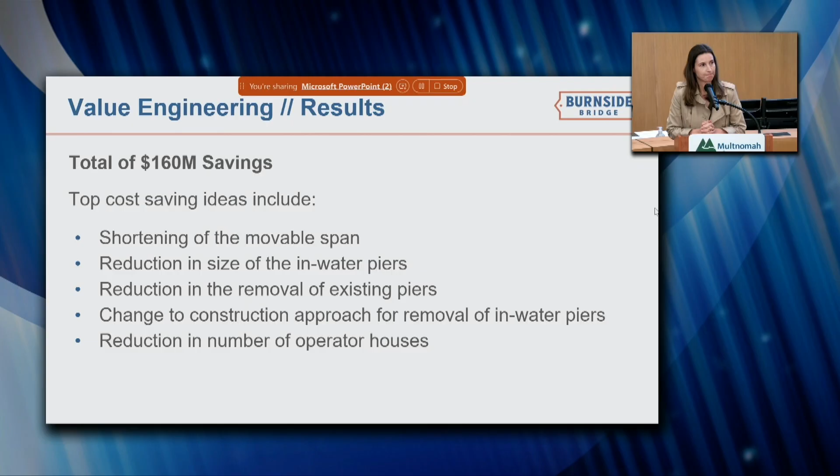After all that was said and done, our new updated range of costs was 1.6 to 1.8 billion. We know this is a pretty significant increase from the cost estimate we had in 2022. It includes all of our project phases, a pretty healthy contingency which is appropriate and industry standard for this level of design, escalation to the midpoint of construction based on the schedule we had at the time, and it incorporates that $160 million in value engineering savings.

So you might be wondering why the increase in costs. Everyone has experienced inflation since COVID, and over the last few years, construction costs are actually increasing at a rate higher than all of our basic commodities. Asphalt used in a different industry is actually less expensive than asphalt in the construction industry, and that's true across the board on construction materials. There's a variety of reasons for that, but at the end of the day, when we need to go get concrete and steel, those material costs are 20 to 40% more expensive than they were in 2022. That's a really significant part of the cost increases.

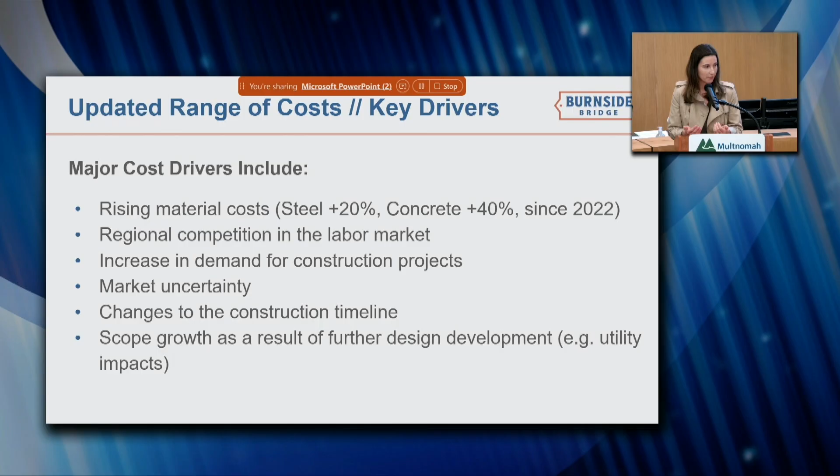At the time we did the estimate, there was also significant competition locally. We have a lot of major infrastructure happening in this region, so just the competition for subcontractors and labor increases the price for the work. And then there's a variety of uncertainties: uncertainty around tariffs, uncertainty around funding possibilities, uncertainty around which projects will go forward and which will not. All of that really lends itself to increasing costs.

And then we have some standard increases around just developing more detail in the design, you discover more impacts. You might find that the place where you thought at a concept level you could put your foundations is actually in conflict with a lot of utilities that we've now done the work to find and locate, and that increases the cost as well. So that's basic scope growth as you get into more detailed design.

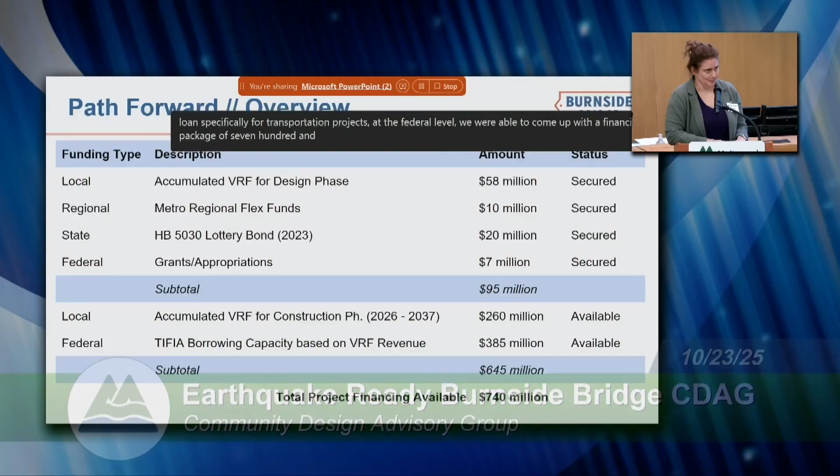At a high level, through our vehicle registration fee and the opportunity to take advantage of a TIFIA loan specifically for transportation projects at the federal level, we were able to come up with a financing package of $740 million. That's a combination of funds we have accumulated to date, so that's our savings from the VRF that we have already collected and set aside for the design phase, which is $58 million, some of which we've already spent.

And then the $10 million from Metro via a regional flex fund grant that I think a lot of folks here helped support the project in receiving - we recently received that. Then also, with much appreciation from this group as well, back in 2023, we were able to secure a lottery bond grant in the amount of $20 million. And then finally, I have $7 million in miscellaneous federal grants and appropriations that we've received, so that totals $95 million.

And then based on our future revenue projections of the VRF and with the really nice loan terms on this TIFIA loan, we feel like we could get another $645 million dedicated to the project. So that's how we are arriving at 740.

But on the next slide, you see, unfortunately, that leaves us still with an up to $1 billion gap. I will say we do have a USDOT Bridge Investment Program grant still outstanding, but based on our current assessment of the federal climate, we really have a low level of confidence of receiving that grant. That's something we've been applying for several years now in the amount of $447 million.

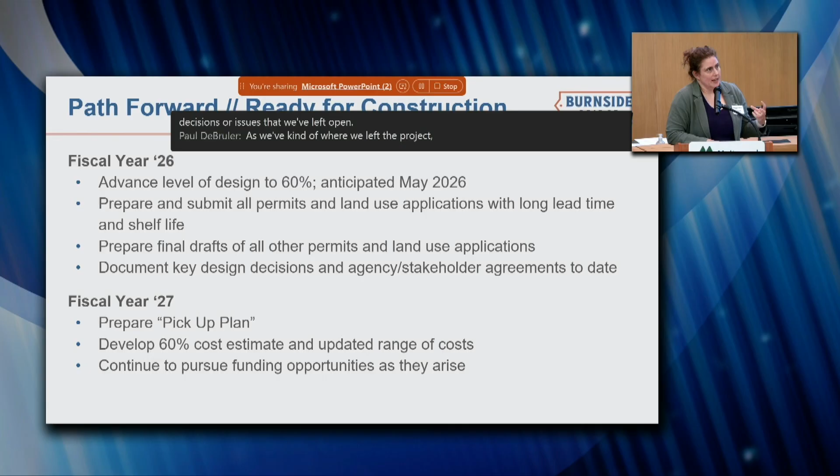So, pretty much addressing all the outstanding decisions or issues that we've left open as we left the project, so people understand what to jump on right away and continue the project moving forward. We will also develop an updated cost estimate based on that 60% package and the same really rigorous and thorough process that Emily mentioned previously that we applied to the 30% package.

And then we'll continue to keep our eye out for funding opportunities. There's a transportation reauthorization bill that's due in Congress, I think, in '27. There's also the 2027 state legislative session. If you've been tracking how the transportation bill went in this session, you know it's sort of a Band-Aid fix for transportation right now, so perhaps in '27 there'll be some political will to revisit transportation's needs and look at passing an additional bill. So we'll be tracking those opportunities.

And then, of course, as administrations change, we will be tracking any new grant programs that may continue from the IIJA package that was previously passed.

So we feel like taking the project to 60% is really the right step and no further. We're estimating it would take about 2 years to complete the right-of-way process to get to construction, and that's about the same time it would require us to take the project from 60 to 100. So we feel like 60% is a really nice sweet spot, especially since a lot of the additional work between 60 and 90 is really specific to the contractor who's going to build the project, so we would possibly have to redo that work if we took it that far and then restarted later.

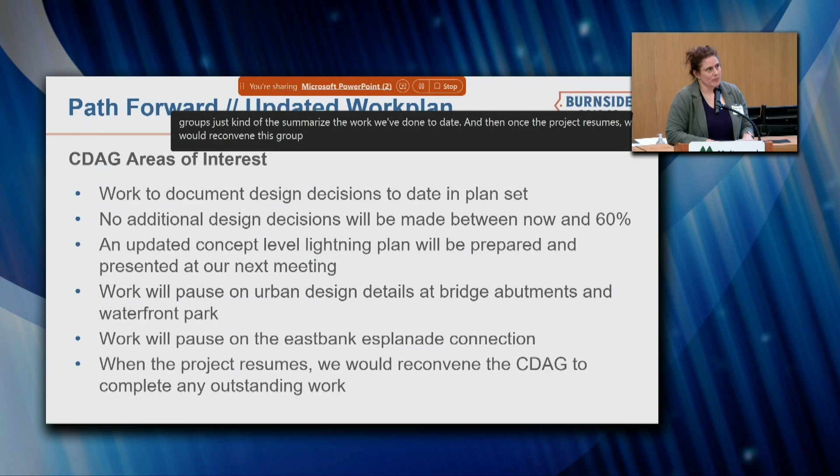We've been working very hard with the city and our consultants over many years to find a suitable solution. We'll go ahead and pause that work and just share with key stakeholders and interest groups a summary of the work we've done to date. And then once the project resumes, we would reconvene this group and complete any of the outstanding work to get the project to completion.

On the next slide, this does mean that we are anticipating that our next meeting on November 20th will be our last meeting until the project picks back up. Our tentative agenda for that meeting is to share updated lighting concepts, and we'll have HLB come back and talk through some of their new ideas and get some feedback. If we don't get through everything today that Keith was planning to share with you, we have that November meeting to continue any topics that have overflow.

We also want to share with you, we are planning to have a centennial celebration of the bridge next June, because the bridge turns 100 years old next year. We really want to help create a community celebration of this important, long-standing bridge in our community.

We'll also do some final thoughts, roundtable comments, closing remarks, perhaps focusing on what you would like the future CDAG group to consider if and when the project gets picked back up. And then we'll also have an appreciation party with some cake and some special guests, just to say thank you for all the extensive, long hours and hard work that you have volunteered as a member of the committee. So that is the plan moving forward.

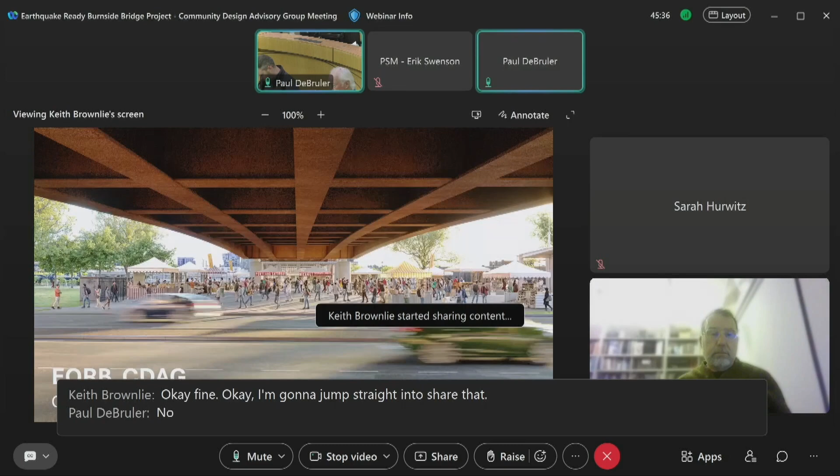And you all have this. You can see this? Yes, okay. Well, how long have I got? 30 minutes? 40, perhaps? Yeah, okay.

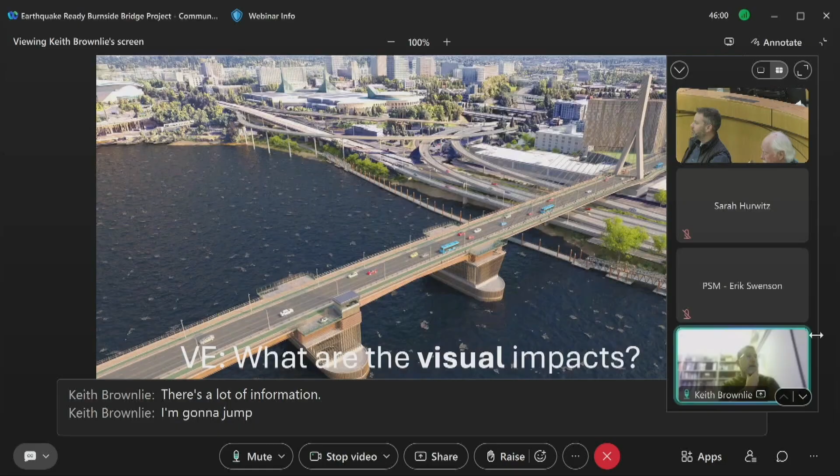There's a lot of information. I'm going to jump straight in. I mean, we've come a long way, certainly since my organisation started on this. You've come a long way. You've come further together.

So the value engineering process has changed a little bit, but just to give you the punchline before the content: you will still recognise the bridge we have debated over the last years and months, but there are changes. I want to run through them comprehensively, but not in so much detail. It's a little overwhelming, so I'm going to give you the headlines with a lot of images, and if you think I'm going a little fast, it's because there are so many of them.

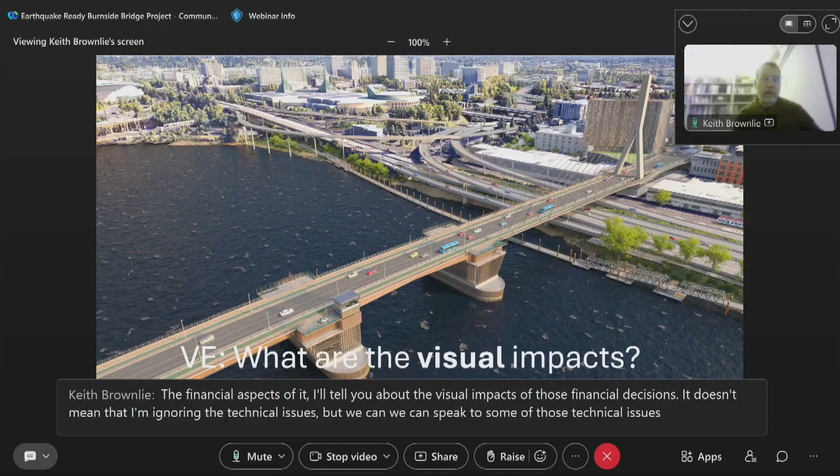So I'm limiting. You've heard about the financial aspects of it. I'll tell you about the visual impacts of those financial decisions. It doesn't mean I'm ignoring the technical issues, but we can speak to those if there are questions. I want to tell you what is different now than the last time we met.

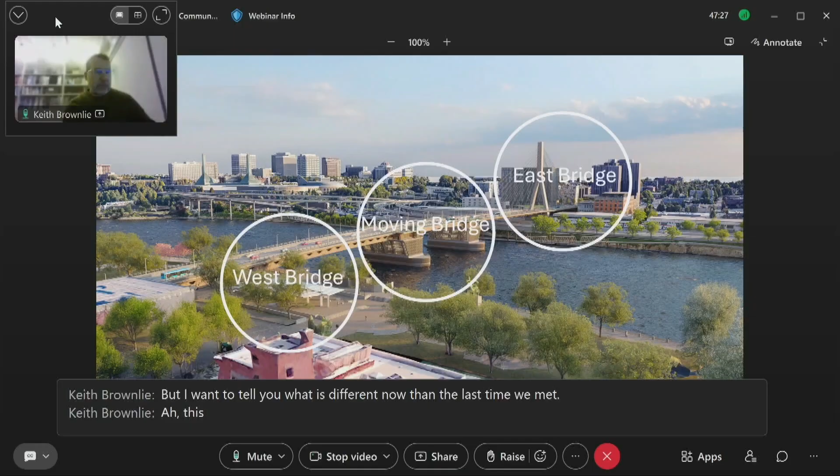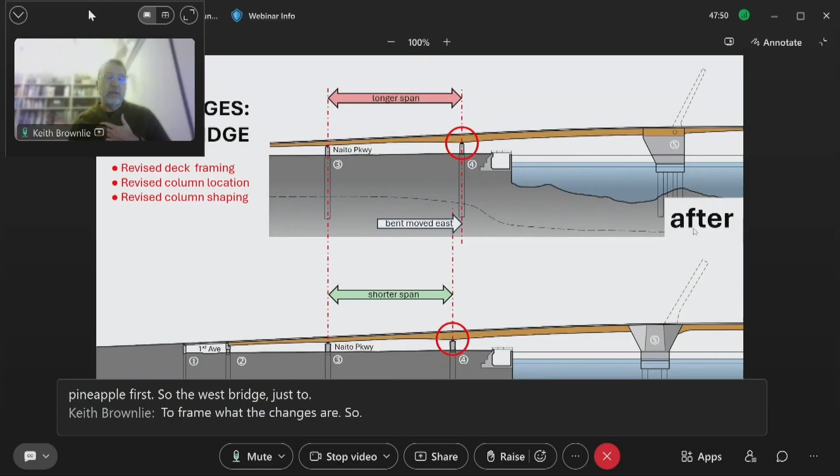So the West Bridge, just to frame what the changes are. The after is the value engineered version. The before is what we call that, and I believe everything before you have seen, but it's possible not. So the West Bridge, the chief takeaway is that we have moved some of the span arrangements around.

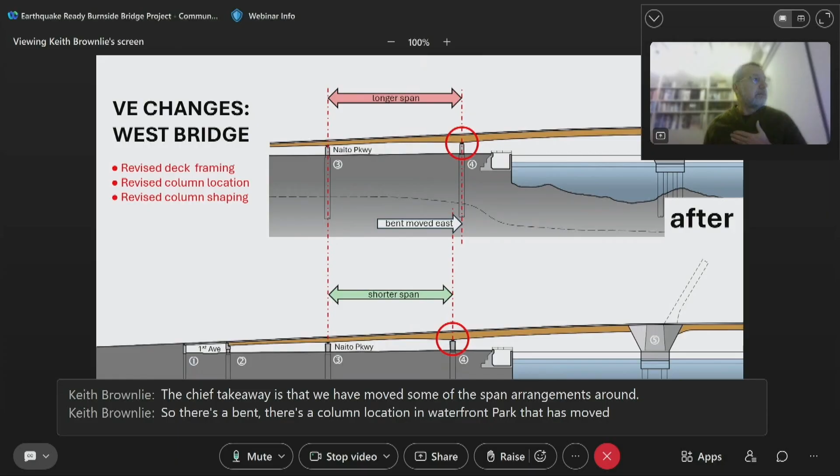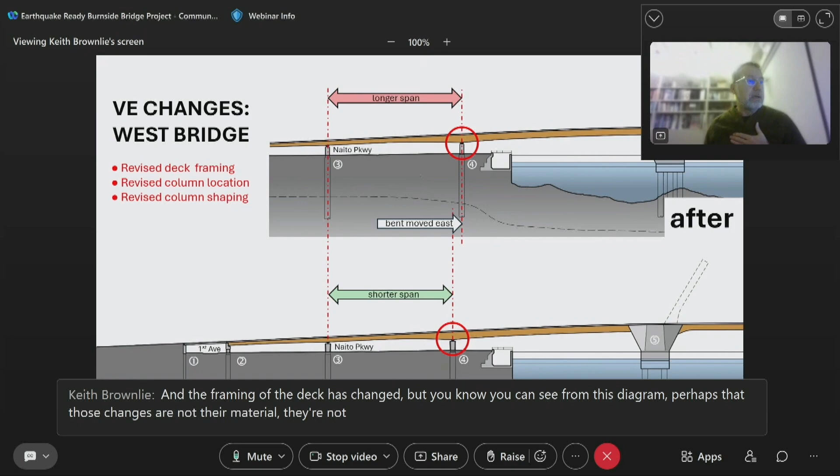So there's a column location in Waterfront Park that is moved, and the framing of the deck has changed. But you can see from this diagram, perhaps, that those changes are not material, they're not serious, one might say. So just a couple of slides to show what those are.

There's a longer span across Naito and Waterfront Park Saturday Market. And by virtue of what we've done in the river, it's a pretty much similar span out to the in-water pier.

We've changed the column location and we've changed the column shaping. What that looks like beneath the bridge: the bridge is the same width, but by virtue of changing the framing a little bit and changing what's happening on the edge, you get a wider soffit. So there's a little bit more coverage over Saturday Market.

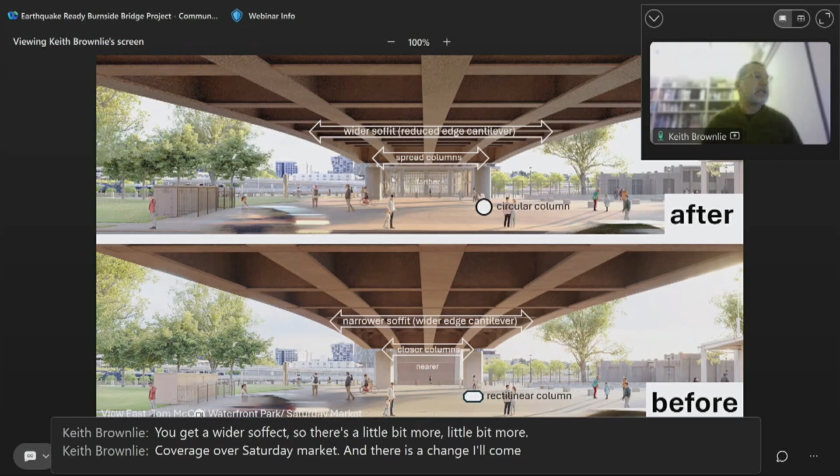And there is a change, I'll come back to this, but there's a change in the status of the in-water pier. And as I said, we've segued from a rectilinear column to a circular column. A little bit more on that later as well.

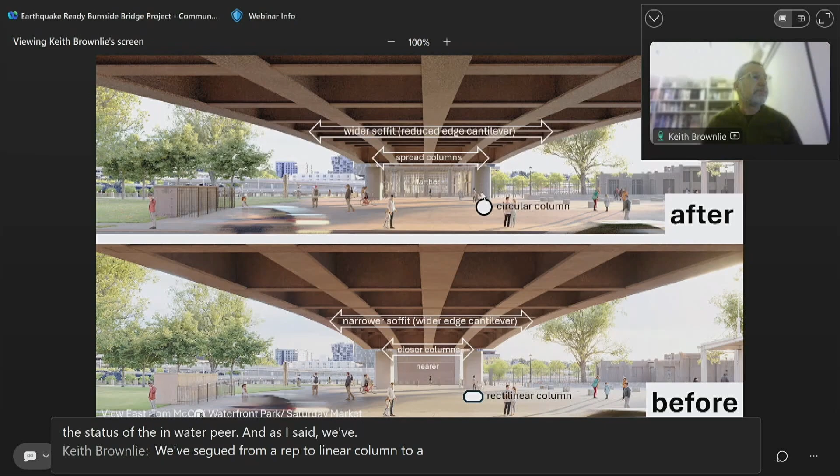So you'll see a lot of slides before and after, and only the cognoscenti would understand the difference in them, really. So, you know, if I get cut off or some such, it's going to be okay, right? It's the same.

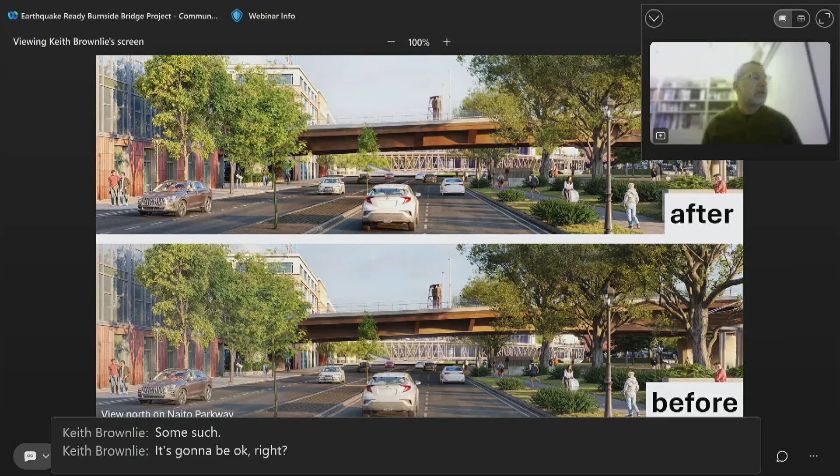So I'll just go through these, and we can pull any of these back up afterwards. But you can see that you would only know the difference if you knew what there was before. Very little difference. I'll just point out again afterwards.

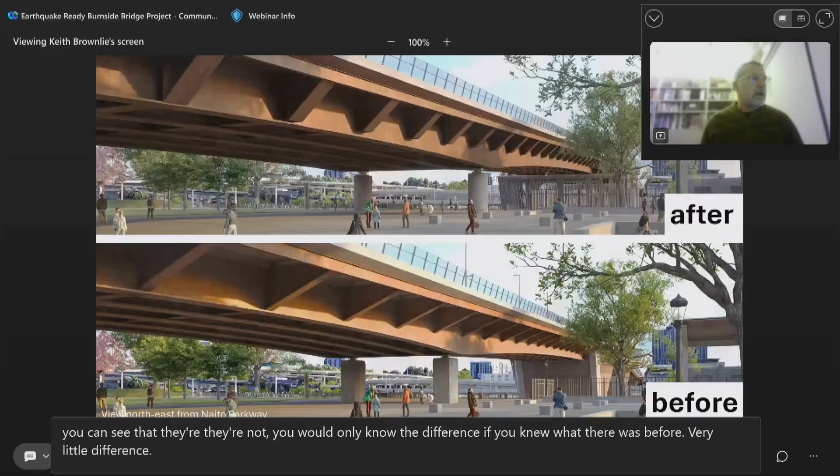So the distance between the edge of the deck and the first girder has changed a little bit, where there's less overhang now than there was previously, which is the kind of thing that keeps me awake, but, you know, only me, I suspect.

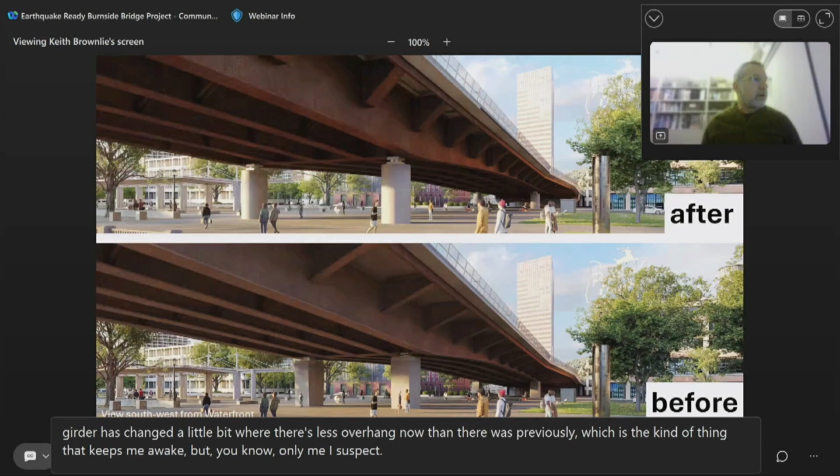View back looking west. And again, this is a discussion really about what the state of the in-water pier is, but value engineering is a kind of interesting process because it purports to add value, but actually it just reduces cost. But sometimes what rolls out of that process is something that's better architecturally as well as cheaper.

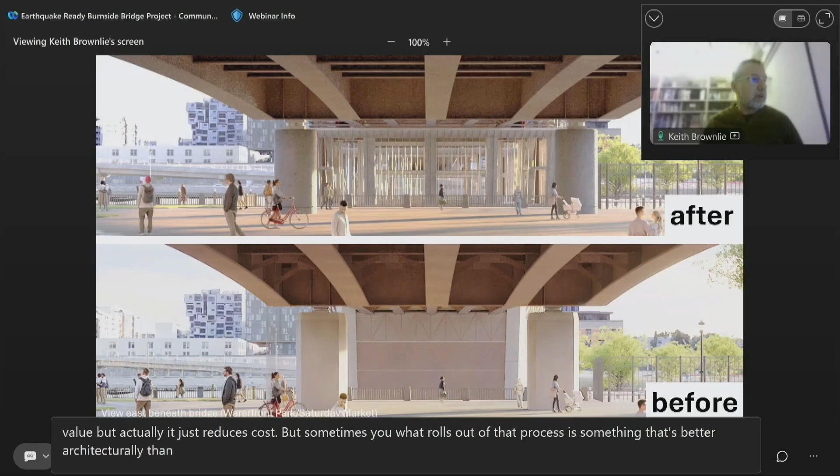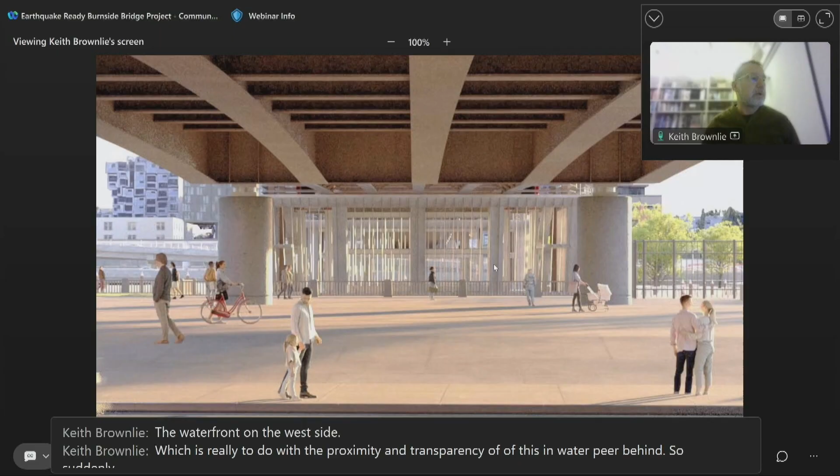And I think in this case, there's something happening on the in-water pier which I think is of interest to the experience in and around the waterfront on the west side, which is really to do with the proximity and transparency of this in-water pier behind. Suddenly, instead of the blank wall that you had previously, you've got a permeable point of interest.

Amongst the team, not from the architectural team but the wider team, there was some concern - a lot of hand-wringing about whether a circular column is something you want, or whether we should maintain the shape.

This is a slightly flippant image, but it really says that surfaces, particularly in the urban realm, are palettes - sometimes for graffiti, but also for art or community asset. So we're not worried about that shaping; we're interested in the opportunity for later. And actually, all of this is moot because that's a populated space - the animation of that space is about the people and the Saturday Market, not the column shape or the framing of the bridge.

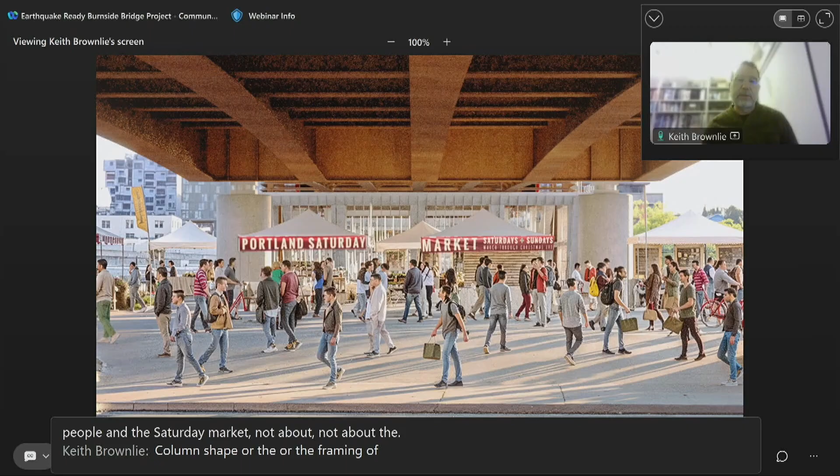So I don't know whether it's appropriate, but we have three bridges, or three sections of bridge, to discuss. I've put in a break to take questions about them individually, but I can push on and do all three at once. Let's pause for technical questions - I saw that Aaron had one.

It's potentially technical or aesthetic. I'm wondering, with the redesign of the cantilevers - as I understand it there's a shorter cantilever as you've moved the structural beams out - but it looks like the cantilever members themselves have gotten significantly wider or thicker. It would seem like it should be the opposite as that cantilever reduces its length, and I'm wondering if I'm just seeing that wrong or if there's anything we should know there.

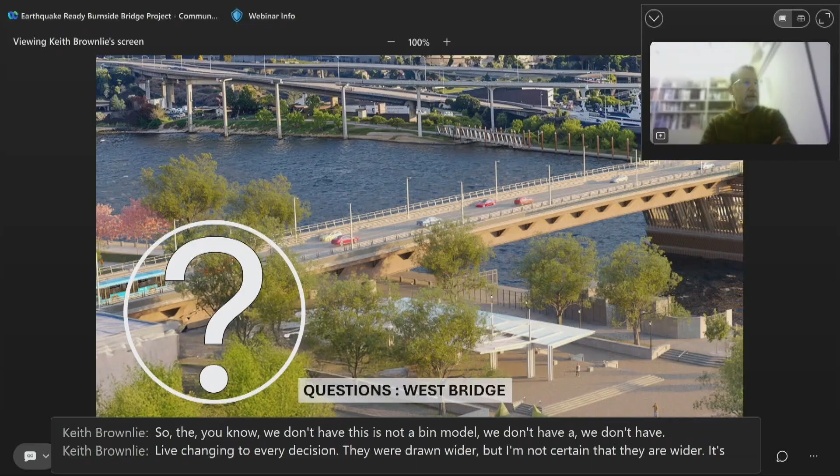Yeah, you're eagle-eyed, Aaron, that's very astute. We don't have - this is not a BIM model, we don't have live changes reflecting every decision. They were drawn wider, but I'm not certain that they are wider. It chimes with me that they should not be that way. I don't know currently, because we're creating imagery almost before technical detail has been done, so I would take these with a little pinch of salt.

Great, thank you. Okay Keith, I think we can move on to the next section. I don't remember which fruit or vegetable it was in the middle, but it's the moving bridge that has more significant visual changes than either of the other two parts.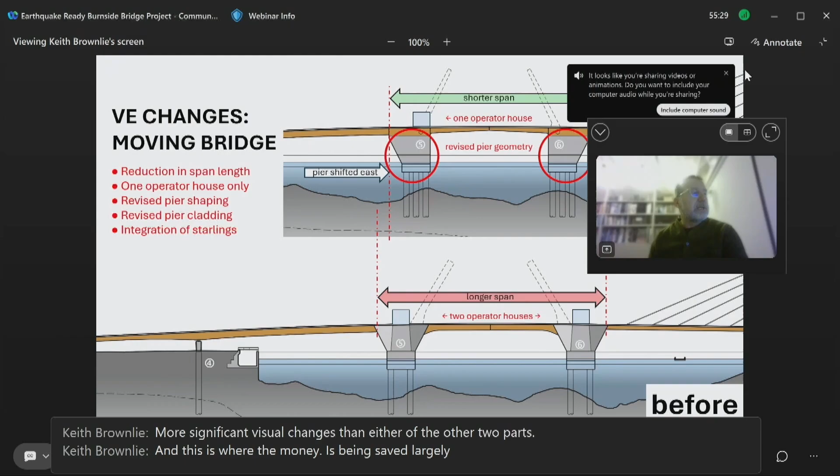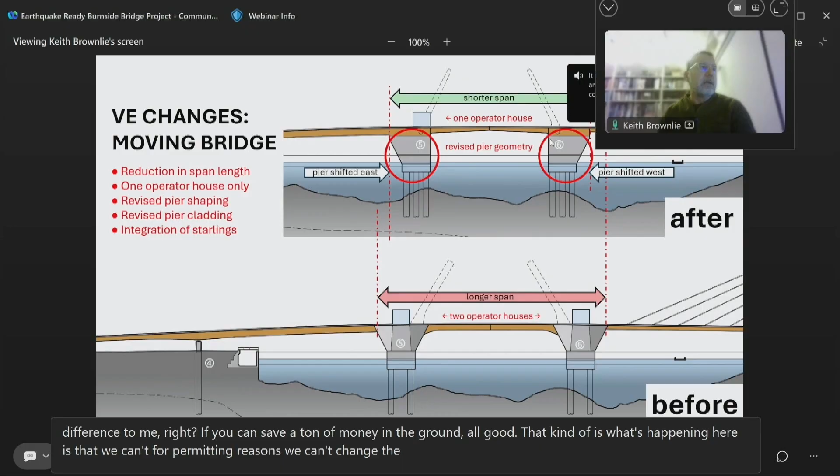And this is where the money is being saved largely. So what's happening is that the two in-water piers - my favorite thing in value engineering is foundations, because it makes no difference to me, right? If you can save a ton of money in the ground, all good. That's what's happening here - for permitting reasons we can't change the navigation envelope, but by changing the geometry of those in-water piers, you can see these now have a vertical inner face that allows us to, in effect, move the piers inwards towards the channel, which makes a significant saving relative to the existing foundation in the ground.

So those changes largely shape position, span - ergo span length - and there are some changes that go with that in terms of the starlings and the operator houses. We have two operator houses; now we have one.

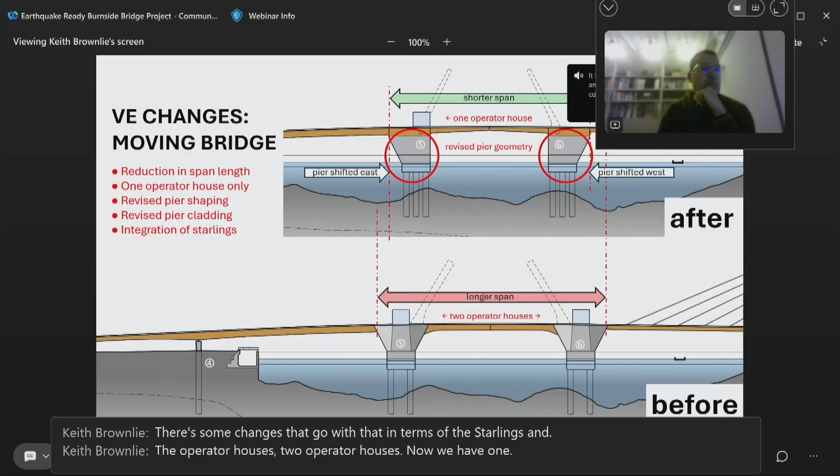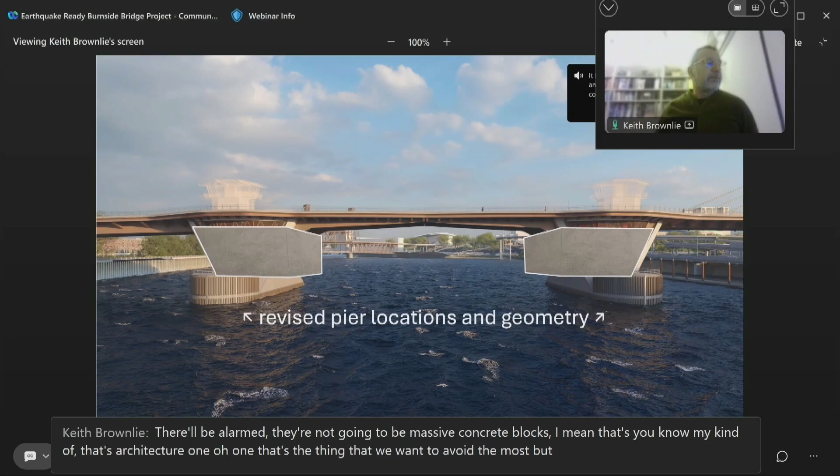So the before is the image, the profile is the revised. Don't be alarmed, they're not going to be massive concrete blocks - that's architecture 101, that's the thing we want to avoid the most. But just in terms of position and shape, that's the overlay.

So we talked about this in the past - the one thing we're very keen on is this horizontal banding, how to maintain that horizontal continuity of the bridge. That's the one thing that makes it a bridge and not three bridges. I'll dwell on this a little, but what primarily allows that, and has changed, is that we are effectively lowering the top of this bascule chamber.

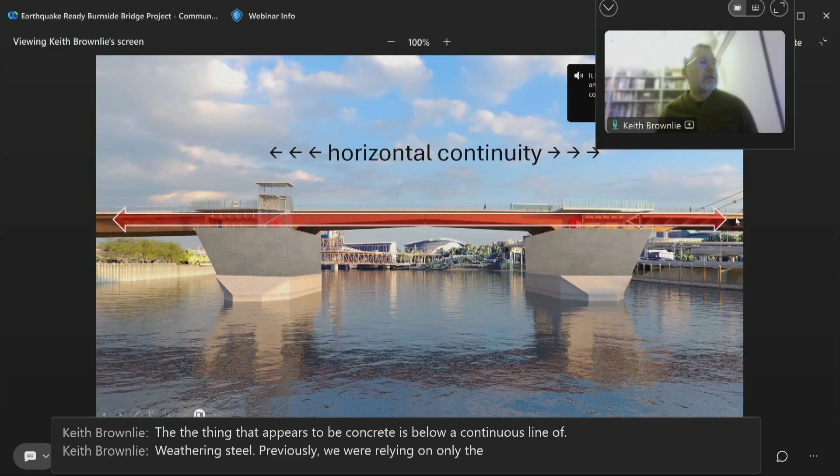So the thing that appears to be concrete is below a continuous line of weathering steel. Previously we were relying on only the edge; now we're relying on the whole superstructure, the deck superstructure, to make that horizontal continuity.

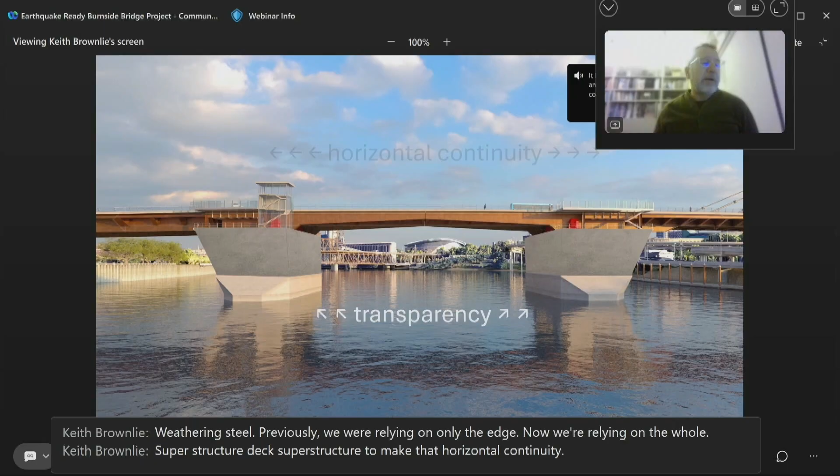Transparency is another thing we've been talking about a lot, and we want to maintain that. We're not interested in the concrete block - you strip that away, you still have quite a lot of structure, but you have a great deal of transparency. I think of this as a Portland typology in terms of the bridges you can see in the background - the revelation of structure and mechanics is a thing on the Willamette.

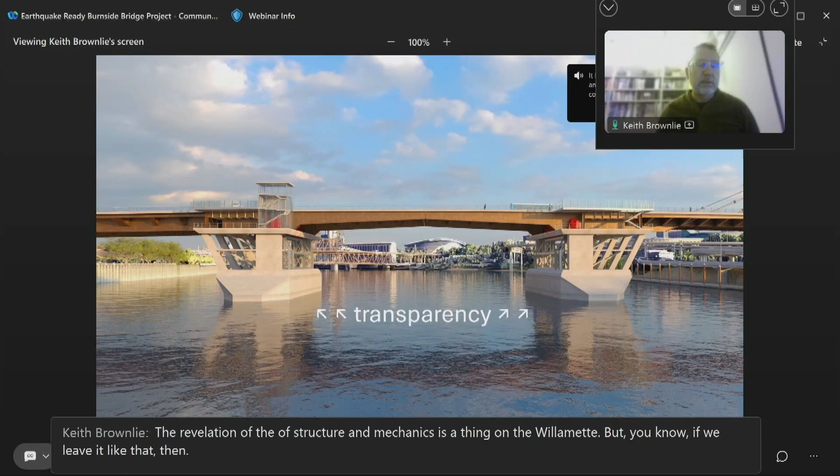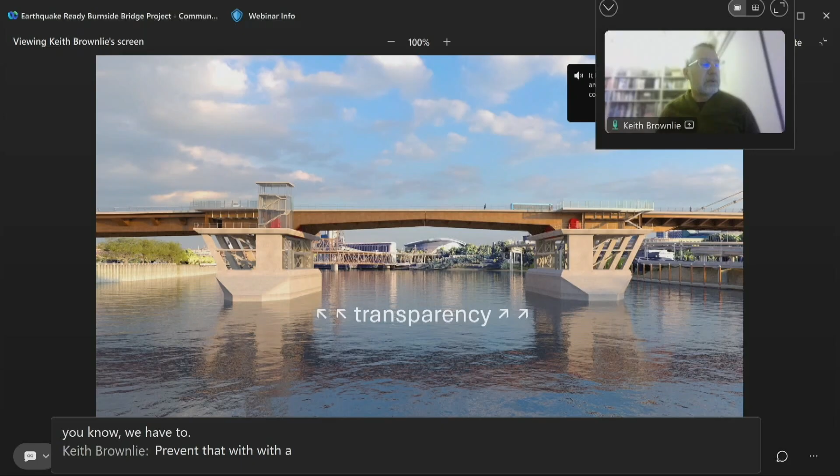But if we leave it like that, you're going to get security issues - weather and security access that we don't want. So we have to prevent that with a cladding, which is what's happening in this case. I'll talk about that cladding in another slide.

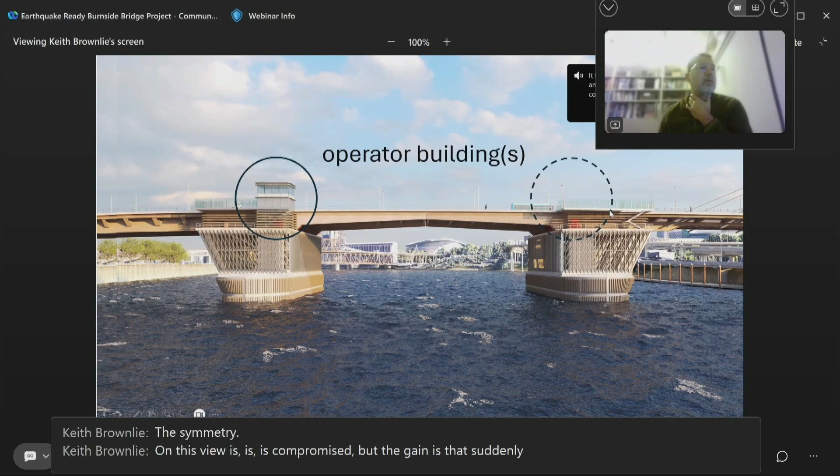Noticing here also the omission of one of those operator houses, and also the reciprocal buildings on the other side for access and egress to this chamber have also gone. So the loss, if one thinks of it that way, the symmetry on this view is compromised, but the gain is that suddenly you get more public space in lieu of that. So that's a gain, I think.

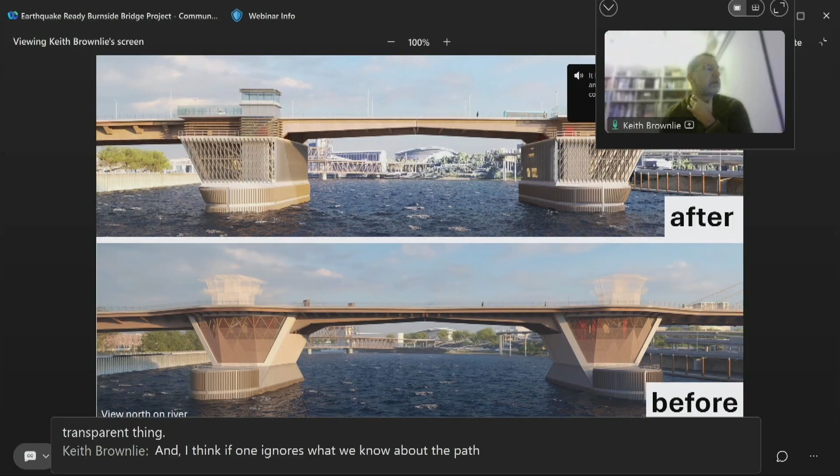So it's a different thing. Visually, I think it's a different thing. But I think it's a more transparent thing. And I think if one ignores what we know about the past, that it holds true into the future.

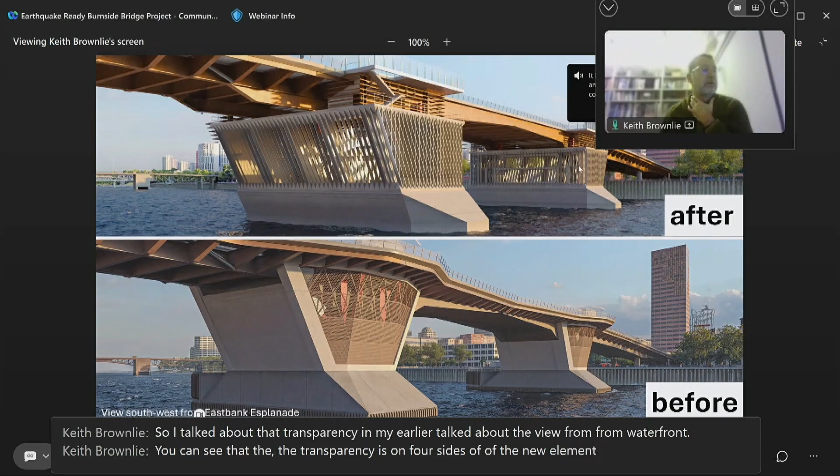Well, I talked about that transparency, and I earlier talked about the view from waterfront. You can see that the transparency is on four sides of the new element, not on two sides, as it was on the previous iteration.

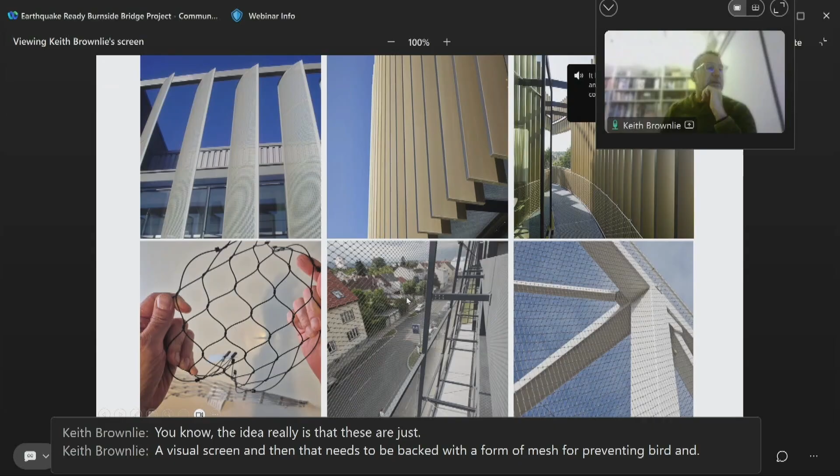Again, I'll come back to that, but the idea really is that these are just a visual screen, and then that needs to be backed with a form of mesh for preventing bird and other forms of nefarious ingress. This is pretty standard stuff.

But I talked about this before, that so suddenly, in the Saturday market or Sunday to Friday situation, you're now looking into and through that bascule chamber, whereas previously you were not. And I think that's one of the kind of chief advantages of this change out.

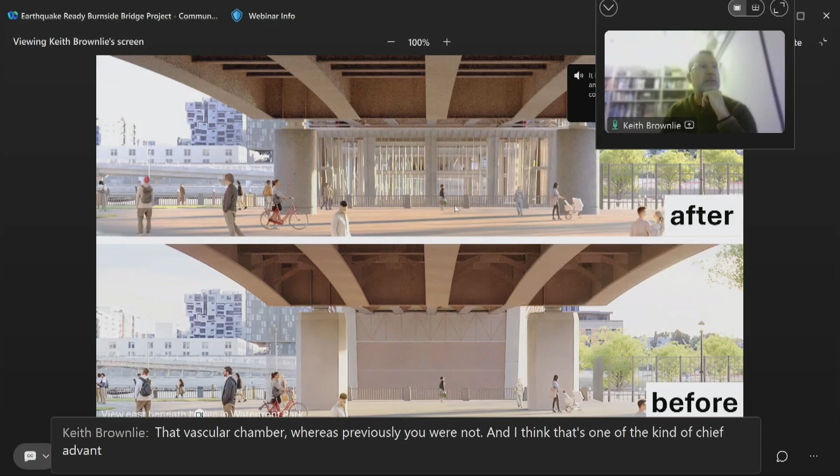I think the material contrast here is something of kind of interest as well. So you can see the difference in previously using the deck edge, the thin deck edge, as the point of continuum, the ribbon on the edge. Now, I mean, it's rather blunter, but it's more, it's driving home that continuity by engaging the whole depth.

And that is entirely to do with revising the datum, which previously the bascule chamber facade went straight up to the deck. Here it stops short and creates a huge shadow gap, a one-story high shadow gap between the mechanism and the deck level.

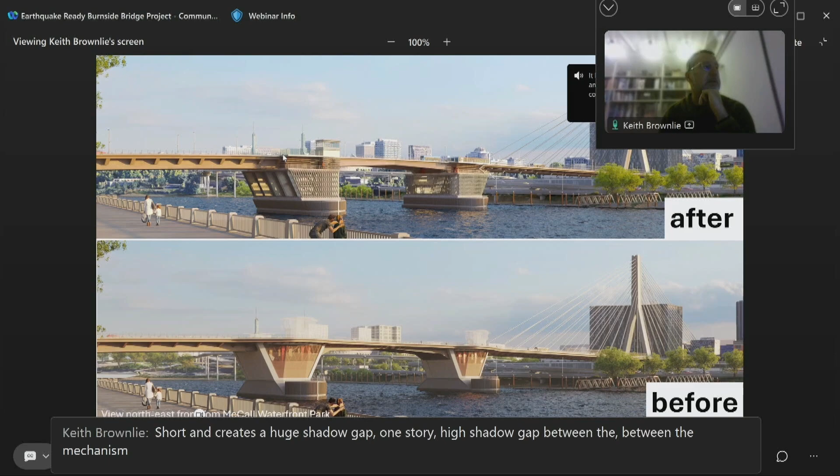View from McCall. I mean, there are things I like, and there are things that I might regret. There's something less fluid about the public realm, but that kind of fantasy bird's eye view perhaps is not the reality for the user on the everyday.

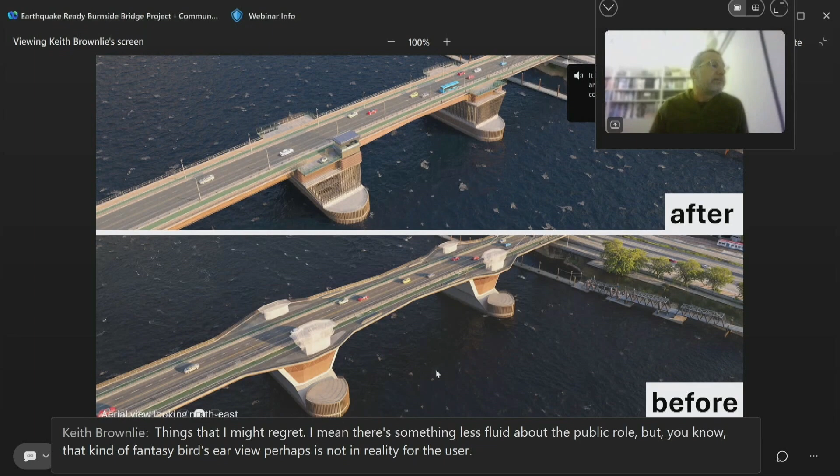So just to rehearse everybody's favourite subject about the nature of this situation here. Remember, this is one of four. All the other three are public. This one is private. It's not public-private, it's private-private.

So in effect, what happens is that the exterior of that zone belongs to the operator on this side. I think that's not really a problem from a public perspective, actually, because over here on the north side, one takes in the views of the Old Town Sign and Steel Bridge and all those good things, and you've got a kind of 50-50 split of public and private either side of the channel.

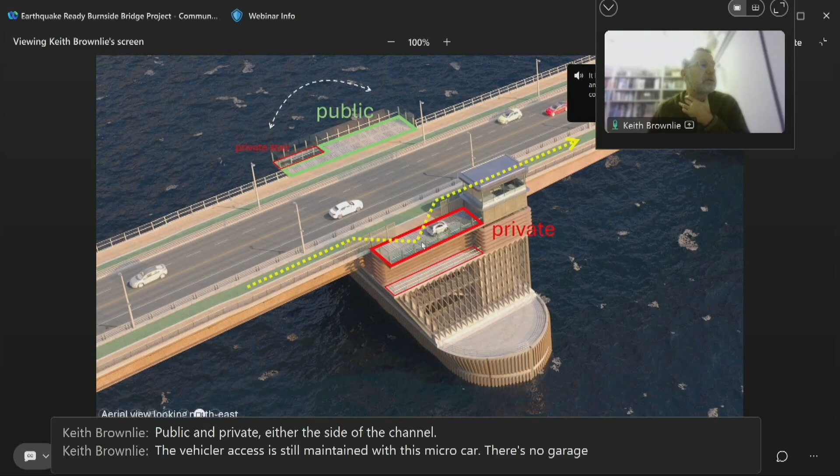So the vehicular access is still maintained with this micro car. There's no garage. He's just putting it into a private space. It's gated. There's no danger. The safety case is better. It's just drive in, drive out, no reversing.

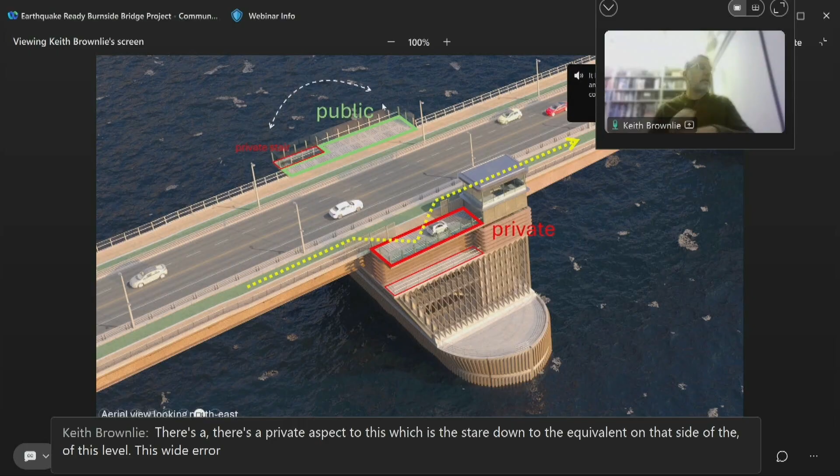And what was previously a building or a cover by the stair is now open. So there's a private aspect to this, which is the stair down to the equivalent on that side of this level. This white arrow is suggesting that currently I think we may have it the wrong way around, because I think pretty much every visitor and every resident wants to stand in this corner and have their photograph taken in front of the old sign.

There's a reason it's this side, and I don't know whether it's going to be visible. It's because the trunnion is in this location, and I want the public to be able to see the trunnion because it's an interesting bit of moving kit, and if you want to understand what a moving bridge is, you need to see the kit that makes it move.

So I didn't want to put the stair in front of it, but we still have a little time to work that out. So again, as ever, there's no architecture in this. This is a placeholder, but we will be architecting this presently.

There's only one of them, so I think even with the financial issues, one could afford to make a decent building here. And you can see that there's a version of the edge fencing that gates that off in this situation.

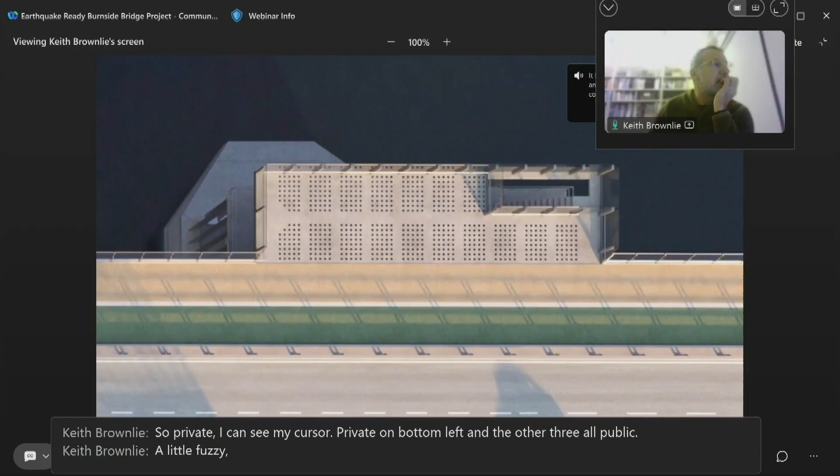A little fuzzy. So that material on there is speculated to be what I would call a pavement light, I think you would call a vault light. You'll recognize them as glass blocks inset to concrete. It's a thing that we've used very often on bridges here on the left.

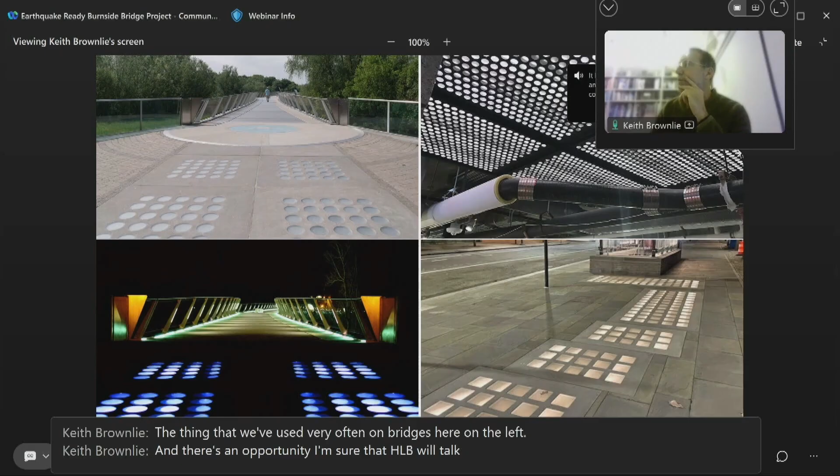And there's an opportunity, I'm sure that HLB will talk about it next time through, but the lighting, both from below to the illuminated surface and from daylight through to the spaces beneath, I think is a good opportunity.

All right. So I just had a couple questions. Sorry. So moving from one bridge operator house to two, or from two to one, does that change the safety or view for the bridge operator in terms of keeping the bridge safe and pedestrian safety?

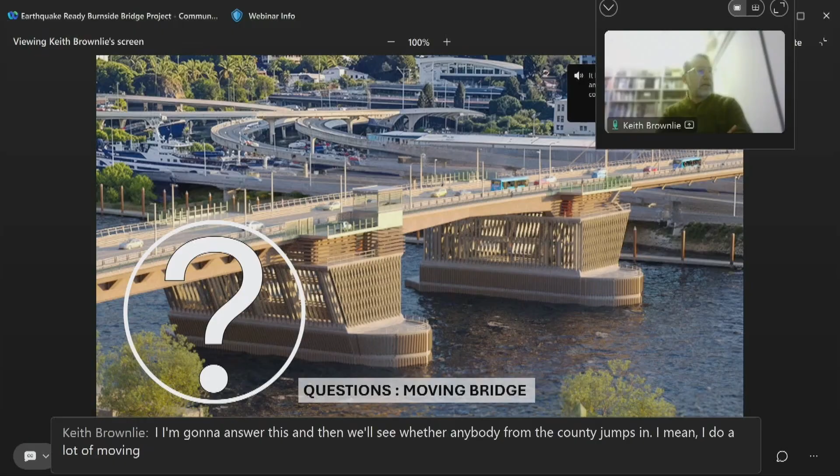Well, I'm going to answer this, and then we'll see whether anybody from the county jumps in. I mean, I do a lot of moving bridges, and in other jurisdictions, there would be no operator houses, and it would be done remotely. So it's a question of resilience, and this whole project is about resilience, right? So if you get a failure, you can move from one to the other.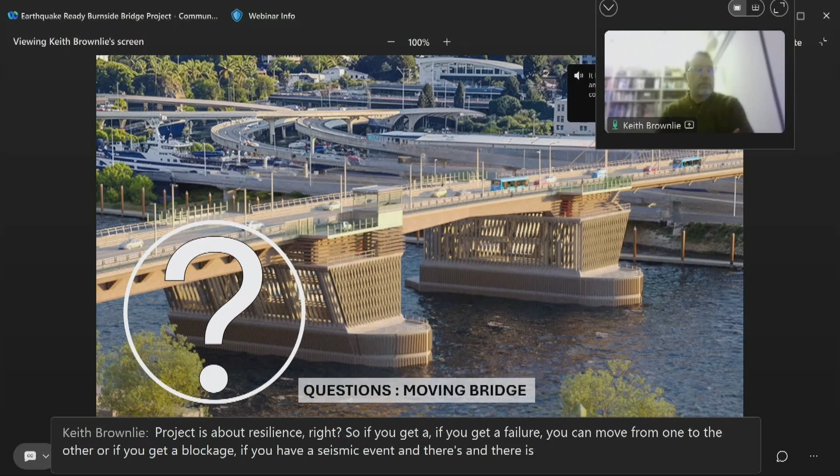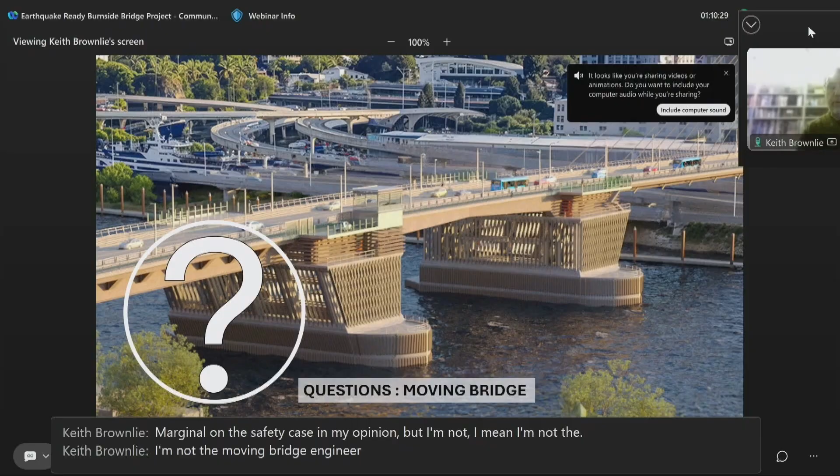Or if you get a blockage, if you have a seismic event and there is some kind of residual damage or something on the bridge that prevents you from using one, you can use the other. But I think certainly there would probably be a remote capability as well. So you're probably marginal on the safety case, in my opinion. But I'm not the moving bridge engineer or the operational strategist.

Yeah, oh, there's feedback there. Oh, right. So one of the concerns that our operator group brought up with the original design with those two head houses on the north side was actually a visual obstruction issue. And so actually eliminating those north head houses created less of a barrier and obstruction for them.

And so they are able to now really be able to see all of the surfaces of the bridge rather than the potential that someone is in a place during operations that they wouldn't be able to see. So there is a benefit to be able to remove the north side ones.

And then I think, as Keith kind of mentioned, even though there's not an operator house on the east side, we can still operate the bridge from down underneath. So it doesn't restrict any ability for us to be able to operate anything. And it's not a safety concern because on the existing bridge and any new structure, we have a whole plethora of cameras that can allow folks to see all the different angles and what's going on the bridge. So we have lots of built-in redundancy for safety and visual aid.

Yeah, I was glad to see the north side houses removed because I work with operators and they were not happy. They were like, from a safety perspective, they would literally have to come out of the houses and go around and make sure things were safe, which is obviously not safe and not efficient for lifting a bridge. The other question I had, that is the public space, is it fully outside of the lift zone? Because that was one of the other concerns on the other bridges, that there were places to sit that were in the lift zone, which were also a nightmare for the bridge operators.

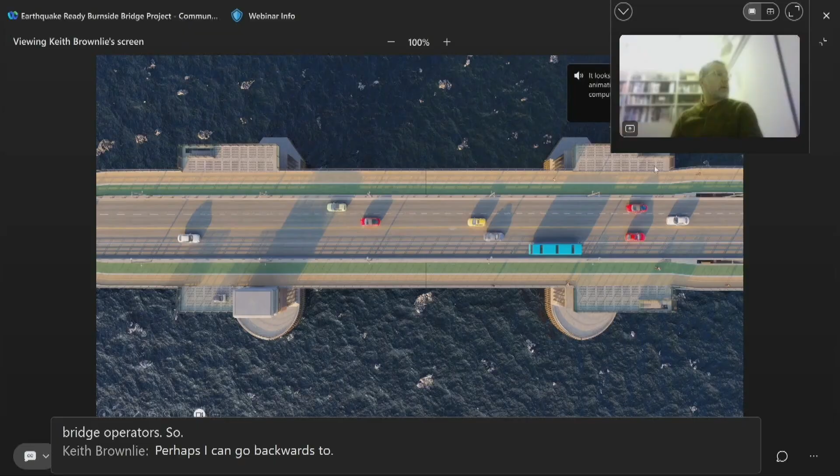Perhaps I can go backwards to, okay, so the joints are not on this, but yeah, the cheap answer is yes. But there's been some debate about whether we have a staggered or a straight joint. You recall previously that we had things called flower boxes, which were a kind of bit of chicanery on the joint, which may be what you were talking about. I don't think wholly any of this was inside of that.

It was about this question of the relationship between a chamfer on the edge of the overlooks and where the joint was. But this rectilinear shape, pulling these back in to be a rectangle, pretty much cures that.

So I don't know whether I said yes or no. There is no overlap, so I'm hearing from Keith that none of this public space would be in the lift zone. Is that right, Keith? Yes, correct. I'm seeing a yes from Emily too. So these public spaces would be stable while the bridge is opening, always level, and will not tilt backwards.

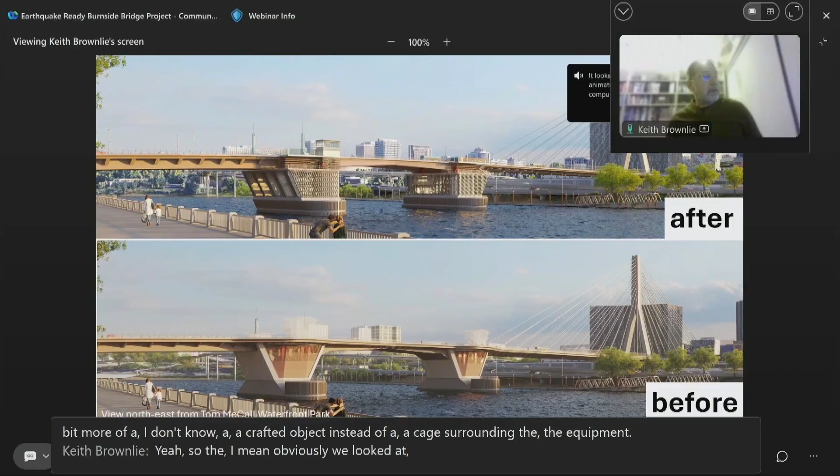So, as I said previously, we looked at lots of iterations of this. What's driving it is that one of the enjoyable aspects of the previous version was the diagrid. It's not coming out very strongly on this image, but I think it would have been a signature figure of it. This isn't of our volition, it's a kind of inherited geometry, but the slope of the back face is required to allow the back of the lifting deck to swing down.

And there is now no need to slope the front face, for reasons of expedience, but also of planning what's in there. So the shape is inherited, but putting the vertical louvers on the inside and outside faces, facing west and east, when you wrap those two faces around the north and south, they overlap and you get this diagrid.

So I understand your concerns. I think it's a little sharp as a geometry, but I think in detail it will have some... I struggle for the right word. I want to say elegance, but I don't really mean that. I think it will have some attitude, which I think is quite enjoyable.

No, I think they're interesting and valid points. Of course, the shelter runs counter to that idea of visibility, but there are always compromises.

Great, okay thanks. Aaron? So I just think in this area, I'm pretty excited about the direction. I think I agree with some of the comments about the awkwardness of the louvers, though I do see the intention of having that band of the bridge deck support all being continuous, which I assume is the horizontal. So maybe this is just a refinement issue. Maybe that'll get better.

But the thing I really wanted to take a moment to focus on is the increase in the public spaces. I'm really happy to see that. I think that's dramatically improved over what it used to be. I think VE gets a bad rap, but I think this is one moment where the loss of one of the operator towers has made the bridge significantly better.

Having 3 public spaces that seem more generous than what I recall them being previously looks really nice. And yes, I agree with the comment about the car. I will probably die on that hill that I don't like seeing the tiny car in the big space, but while I still hate it, I actually like it a lot more for one particular reason.

But before I say that, I have one concern that maybe I'd like Keith or someone to speak about. This is essentially a giant maintenance yard, and I wonder over time how you envision preventing it from accumulating old oil and spare tires and other random bits and pieces from the operator house spilling out into this public and highly visible space.

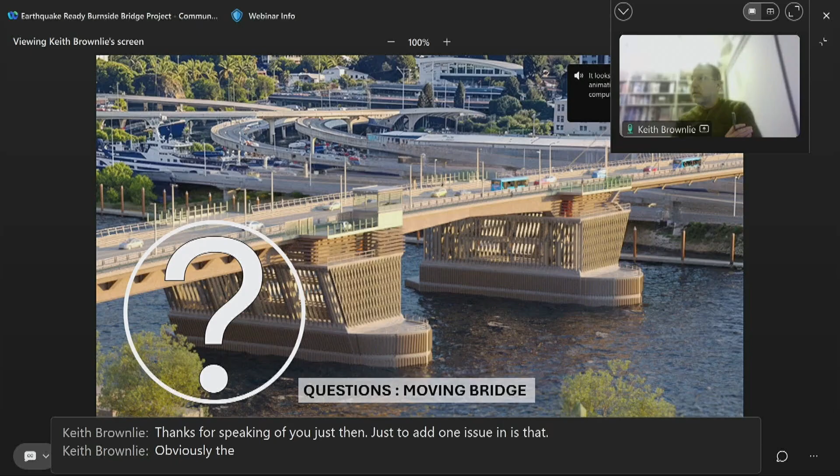Great, and then Keith, you wanted to chime in? Yeah, sorry for speaking over you just then. Just to add one issue in is that obviously the operator house is upstairs - it's that glass box on top of a solid box in certain terms. But the only thing that's in that solid box at deck level is a restroom and a staircase, and there is storage opportunity in there, of course, but it's a fire safety case, so things can go in there, but I didn't like the sound of old tires and oil cans - that sounds pretty dangerous, so they're not going in there.

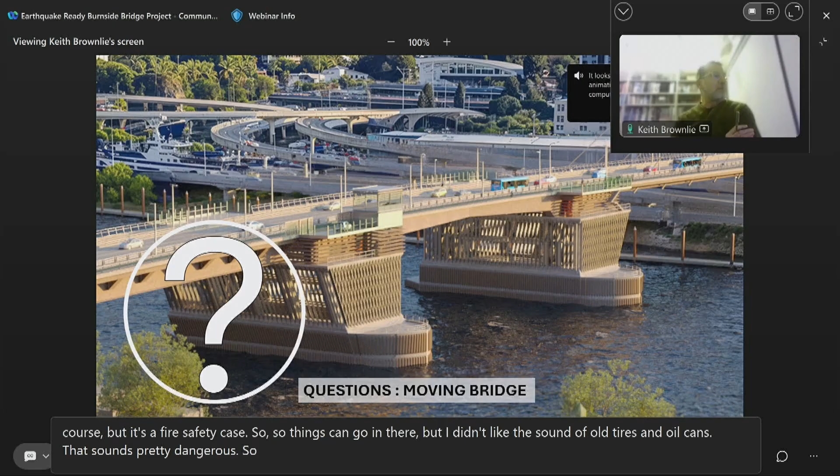Great, all right, Gabe has our last question for this section, and then we're ready to move on to the east span. Just an opinion about the design.

I love the openness of the louvers on the sides, but on the faces of the bridge, north-south, they do remind me of something that I see just way too much, and that's just fences everywhere, cages, really rigid. Is there a possibility of blending those two models, decreasing the concrete used on the east-west sides, but then keeping the original kind of chamfer design of the bulkhead? And to the same note, the chamfers on the top of the bridge really were blending the bridge together to take it from those 3 units to one fluid thing, kind of replicating the shapes of the inverted Y. And now we have a very kind of disjointed look, so possibly chamfers just on the exterior sides of those kickouts, to help blend and mimic what's going on underneath the bridge.

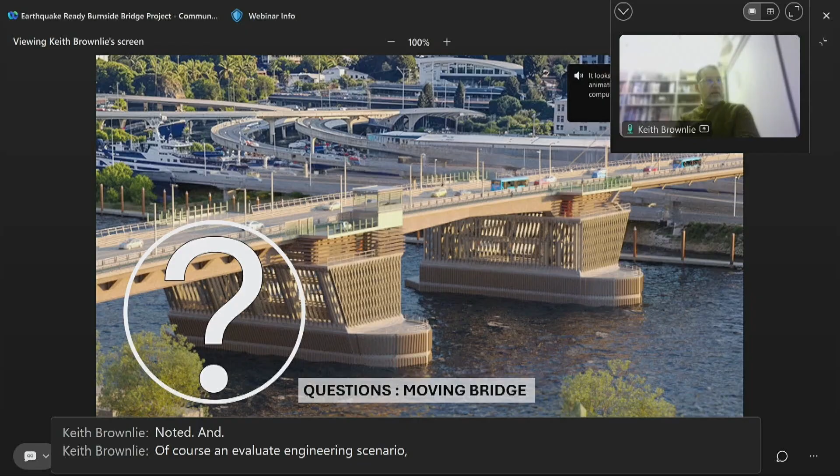Okay, yeah, noted. And of course, in a value engineering scenario, I would agree with you. But the exercise to control the cost comes with architectural cost. So, as I said, some things I think are better, some things I think still need to be proved out. So I definitely hear you. Yeah.

Great, thank you Gabe. Okay, so I think we're ready to head on to the east side, and just confirming, we don't have any public comments, so we're just going to use that time. So Keith, you've still got about another 15 minutes or so.

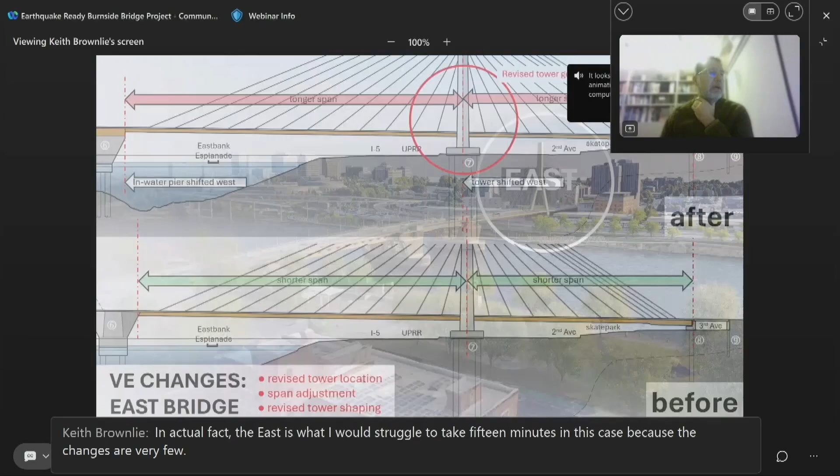Okay, well, in actual fact, the east is - I would struggle to take 15 minutes in this case because the changes are very few. So the tower has shifted west. I can't give you a dimension for that because I don't know it, but not so as you'd notice, I think, would be the chief takeaway on that. And because it's moved, that gives you a little bit of change on the cable array, and there is a little bit of tower shaping change.

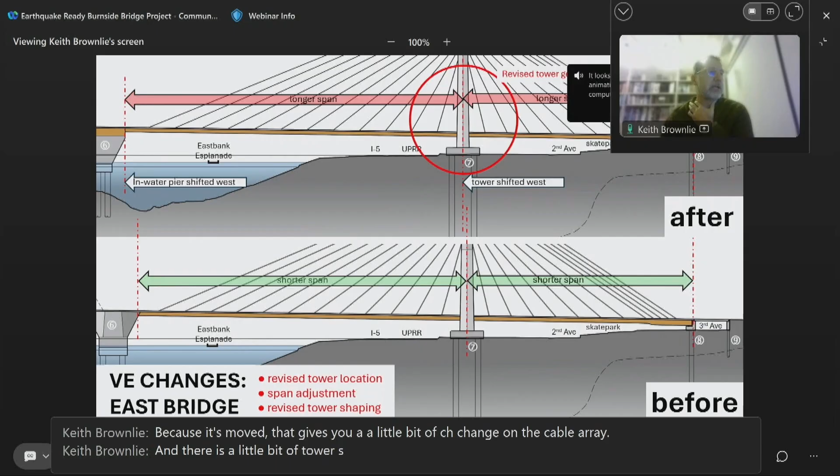I don't want to bite the hand that feeds me, but in terms of the value engineering decisions, this is the one that I dislike, which is the removal of this central rebate on the left-hand side, the one that runs up the top shaft.

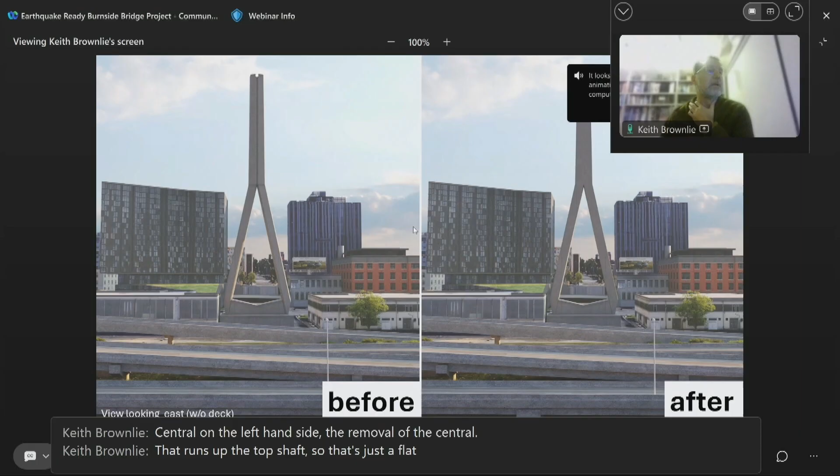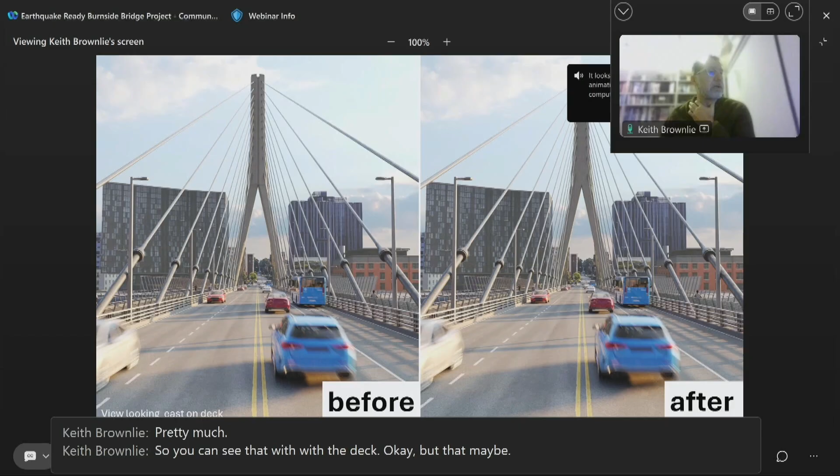So that's just a flat surface now, pretty much, like you can see with the deck. That may be immaterial to everybody but the architects in the house, I think.

I just think it needs that articulation, because now it looks like one thing as opposed to two things leaning together. That's my concern. But before and after, pretty much everyone else driving down the same bridge won't recognize any change. It's still chamfered on the side, just a little bit less.

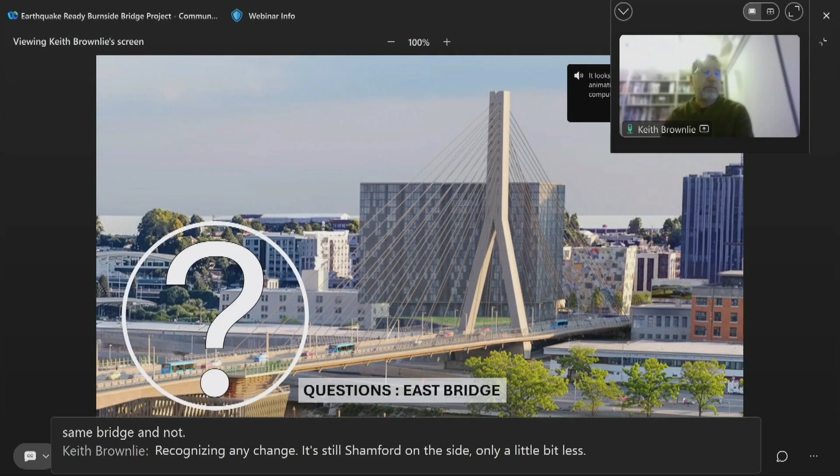So we've arrived. How did I do with my 15 minutes? You did fabulous, that was the best 15 minutes ever.

I would love to know how much is actually being saved with the elimination of this detail. I think this detail is really central to what makes this project unique and special, and it really changes the reading in a significant way when it becomes a single object. I know it has the little notch on the top, but I feel like we're really sacrificing something important there, and I'd love to know specifically how much we're saving, and is that really worth it in the long run?

I'm not sure if Megan wants to answer that, or Keith. Megan, you want to? Yeah, I just really appreciate that feedback. I don't have the dollar figure off the top of my head, but I think that was one of our goals coming to this group, just kind of hearing a reaction to these changes, so I appreciate that feedback. But that might be something we can look at and bring back to you.

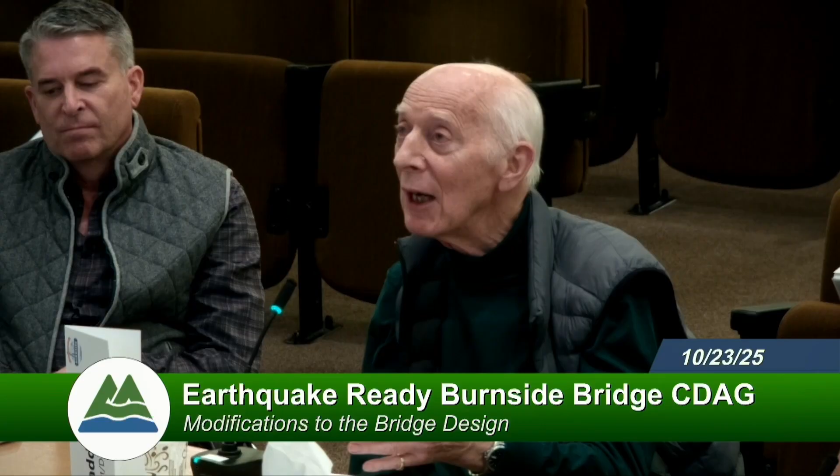So at nighttime it will give it a very distinctive look. So I think, unless the savings are absolutely astronomical, this is not value engineering, this is cost cutting at the cost of the design, and that's never a good principle. So I would say, please put the slot back. And I would also like to echo what Aaron said about pedestrian access - that is not an optional extra, it is an essential feature. So please note that too.

Thank you, great, all right. Bob? I could be brief - check, check, check, and check. But I'm going to get on the same hill with Aaron and Diane, I'm just going to start from a different side of the hill. We'll get to the same spot up top.

The tower element, as you well remember all of us, that was a big deal, we really wrestled with that. We were trying to figure out cost and value benefit, and it became clear to the community that as a piece of urban architecture for the bridge, for this project, it's one of the singular events that is so important to it as a piece of architecture.

So we're giving you another round of ammo, Keith, with our support, that this is something we need to fight for and figure out a way that it doesn't turn into this lump of concrete and we lose that elegance, that very important piece of the bridge. This is something that's singular to the city of Portland, and something we have to figure out a way, with engineering and architecture and lighting, to make that still sing.